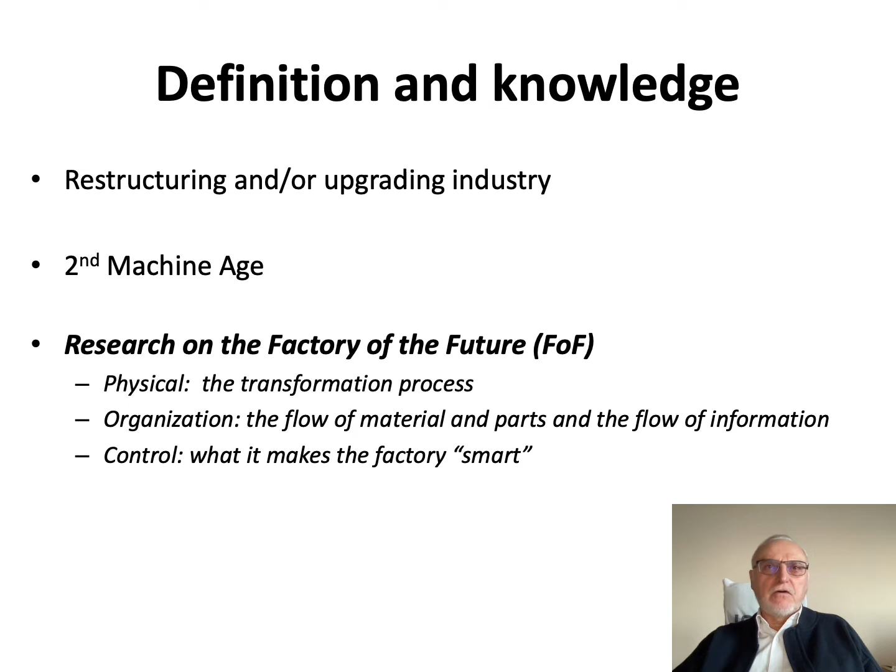And this will be in the idea of a second machine age. First, definition: restructuring and upgrading means how the industry really is changing, has changed, and will change. Then I will give a definition of what is a second machine age. And finally, I will give some indication of how the research on the factory of the future is done presently in our region, for physical organization and control of a factory, what makes a factory smart.

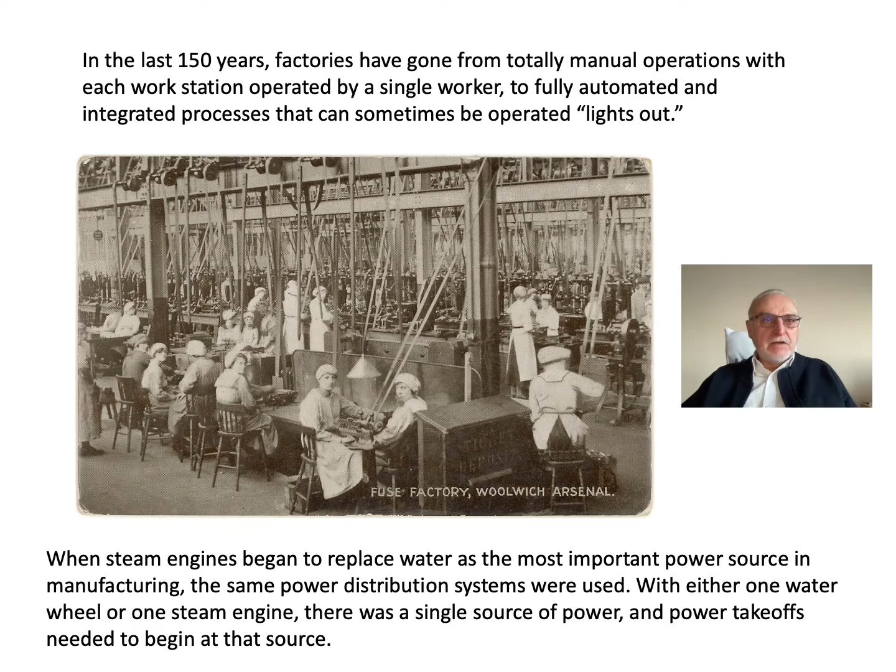In the last 150 years, factories have gone from totally manual operation to single worker, fully automated and integrated process. In some cases, we can even say that the factory can keep working and producing product without light. The steam engine has replaced water as the most important source of energy, and not only steam now, but electricity has changed completely the way in which a factory is run.

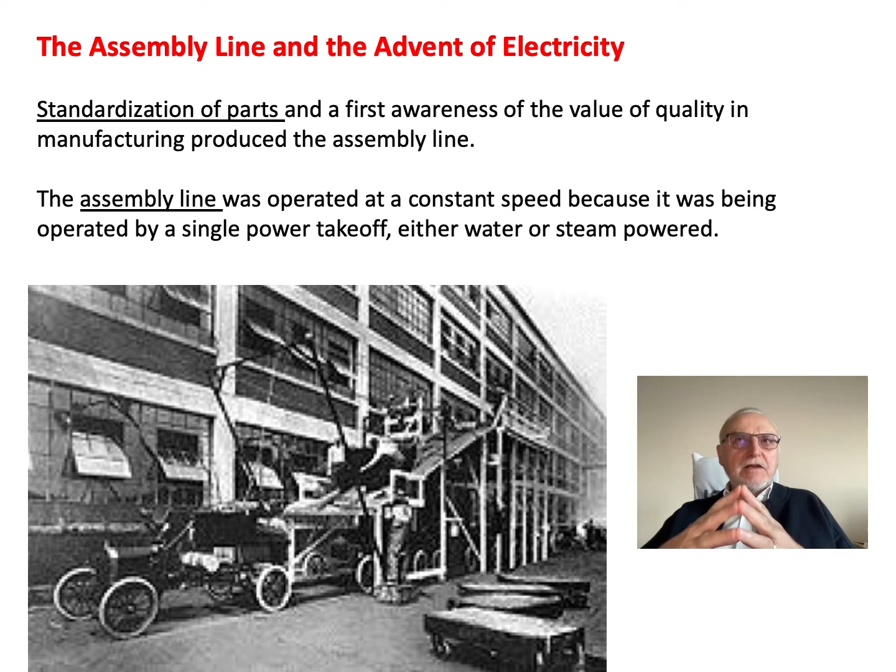But it's not only electricity, as you can see applied here to the first assembly line for car manufacturing, you know very well Ford. But it is also one contribution from Ford as an engineer: the standardization of parts. Because standardization of parts means also to be aware of the value of quality in manufacturing and assembly line.

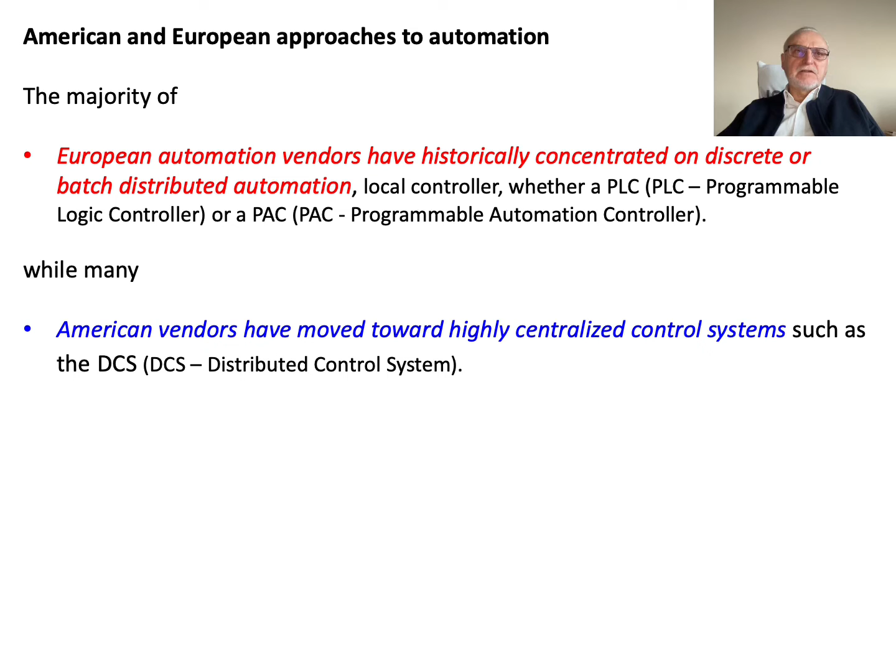American and European approaches to automation are different. The majority of European automation vendors have historically concentrated on discrete and batch distributed automation, some with a local controller that we call a PLC or PAC, Programmable Automation Controller. While many American vendors have moved towards a highly centralized control system such as DCS, Distributed Control System. When manufacturing cells are independent, distributed components, the control level is very sensible. We think that the European way to do automation is more flexible and easier to implement.

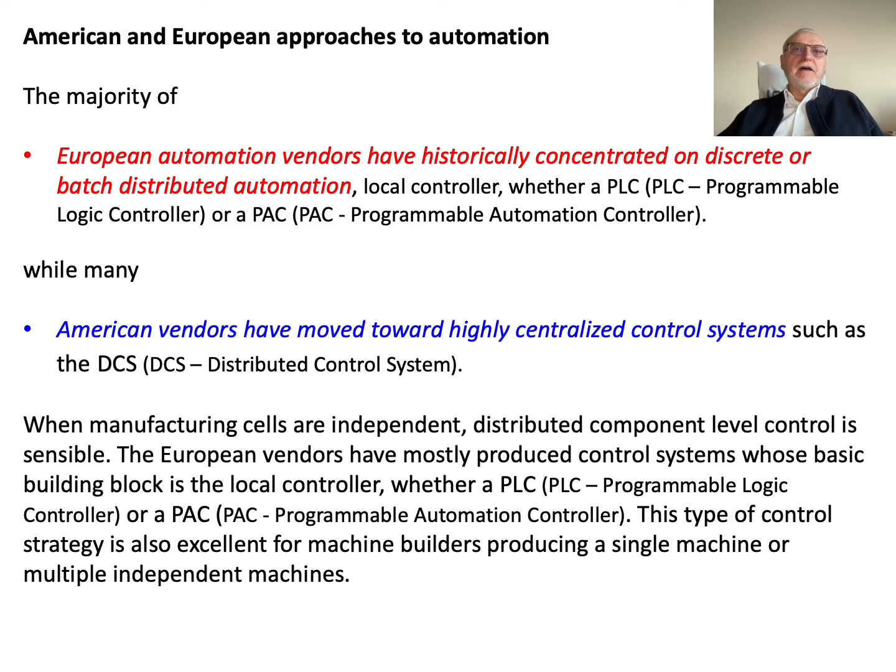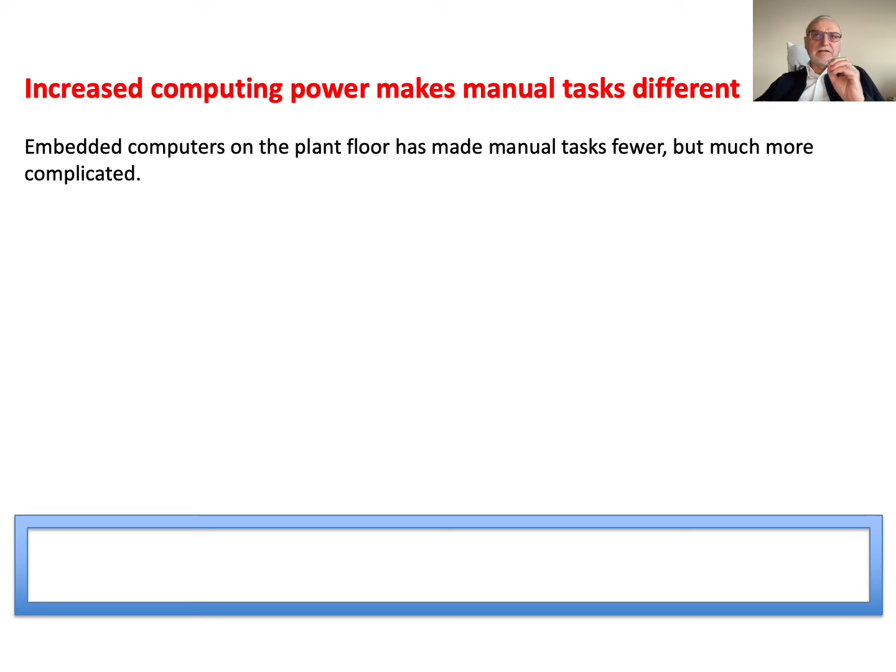Increased computing power is also the next step of a factory of the future. Increasing computing power makes manual tasks different. Embedded computers in the plant floor have made manual tasks fewer but much more complicated. Workers not only do the tasks machines are not capable of performing by themselves, but it is also becoming the worker that is implementing the automation.

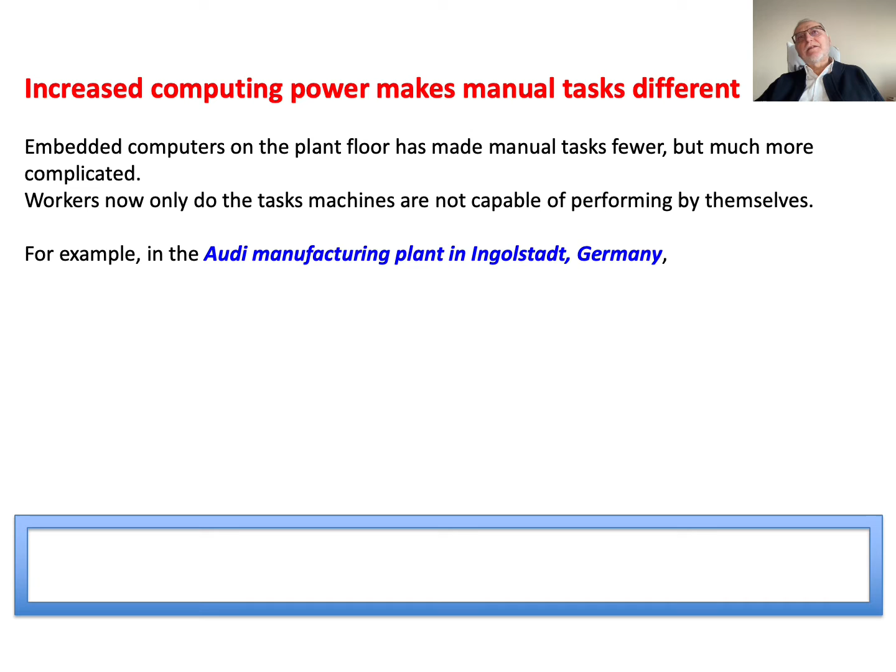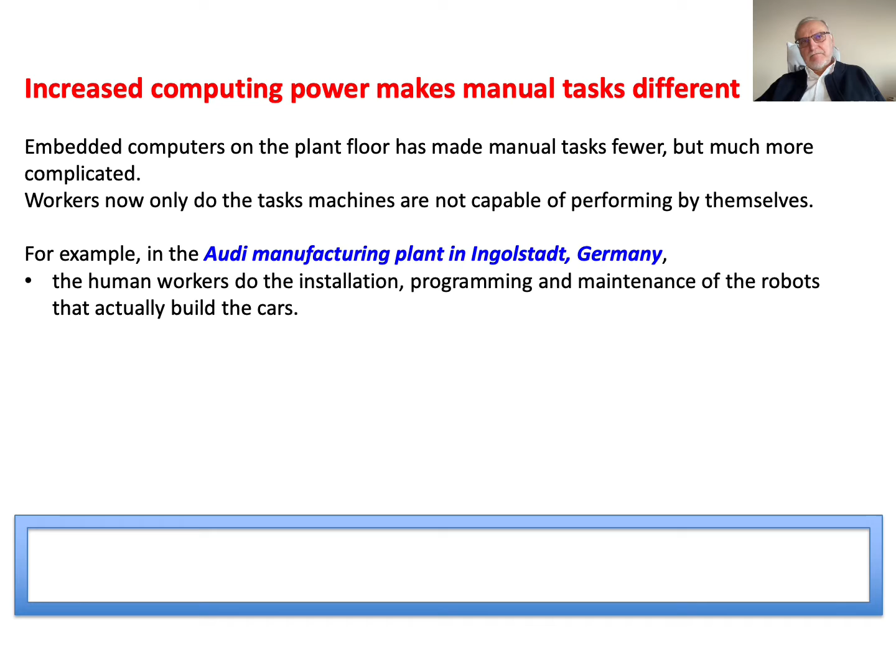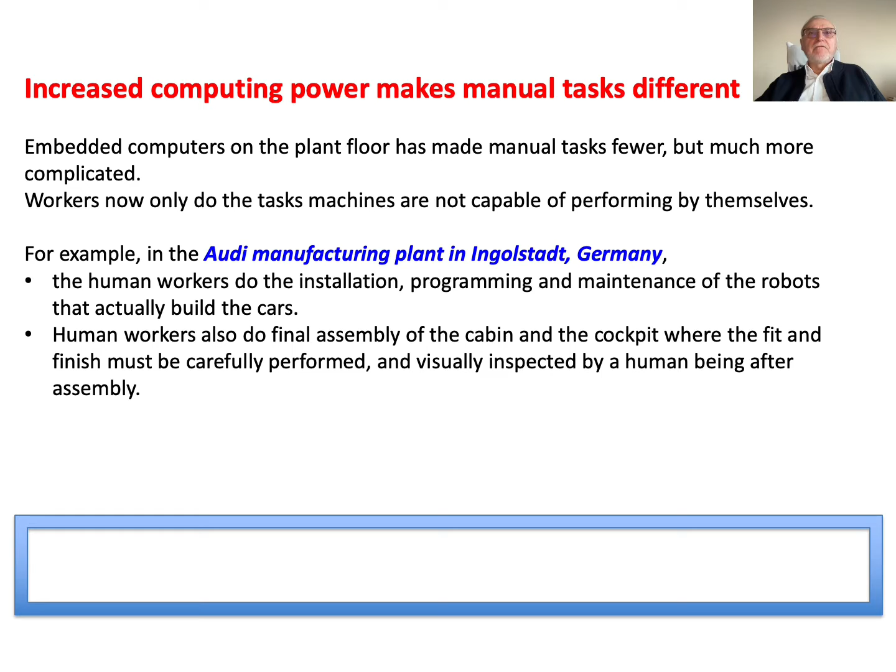For example, in the Audi manufacturing plant in Ingolstadt, Germany, the human worker does the installation, the programming and maintenance of a robot that actually builds the car. Human workers also do the final assembly of the cabin and the cockpit, where the fit and finish must be carefully performed and visually inspected by a human being after assembly.

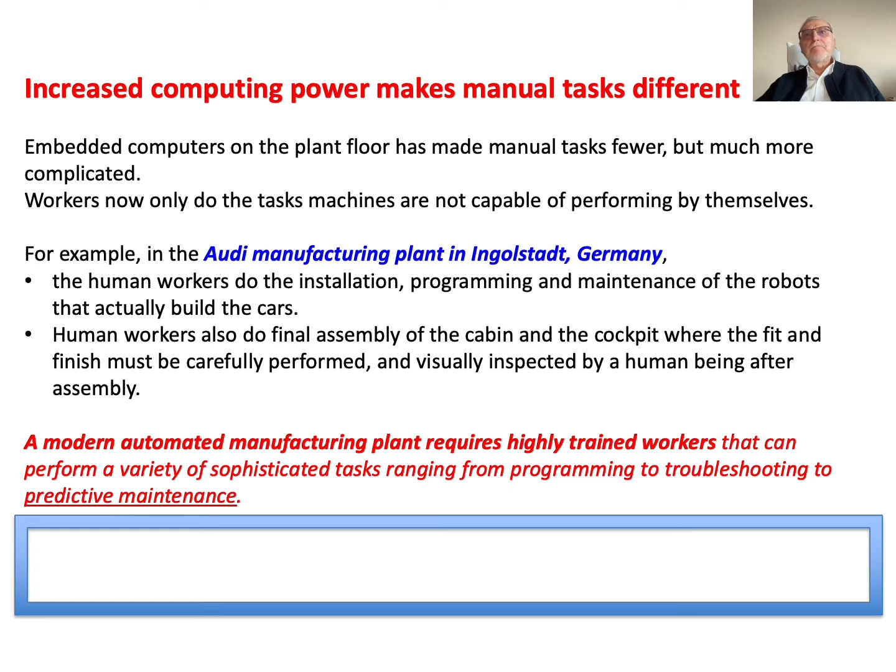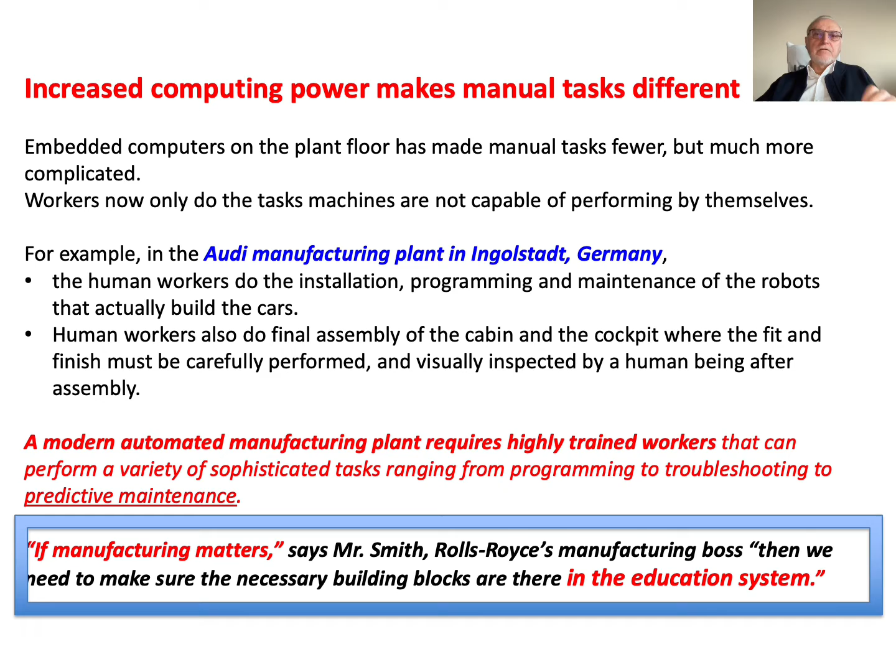A modern automated manufacturing plant requires highly trained workers that can perform a variety of sophisticated tasks ranging from programming to troubleshooting to predictive maintenance. The head of Rolls-Royce Manufacturing said, if manufacturing matters, it is important that all the building blocks are taken into consideration. And particularly, we need education for the workers that are in the plant and around the plant.

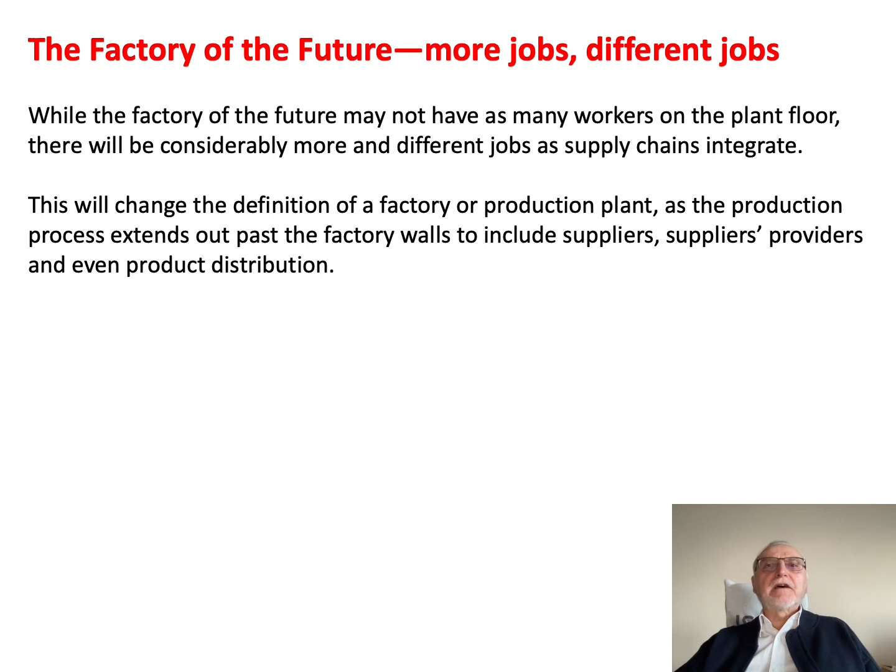The factory of the future implies more jobs, but different jobs. Many people, particularly in Europe, think that automation is killing jobs, but that is true only for certain kinds of job. Many workers on the plant floor can be educated in order to better integrate automation with manual plant work.

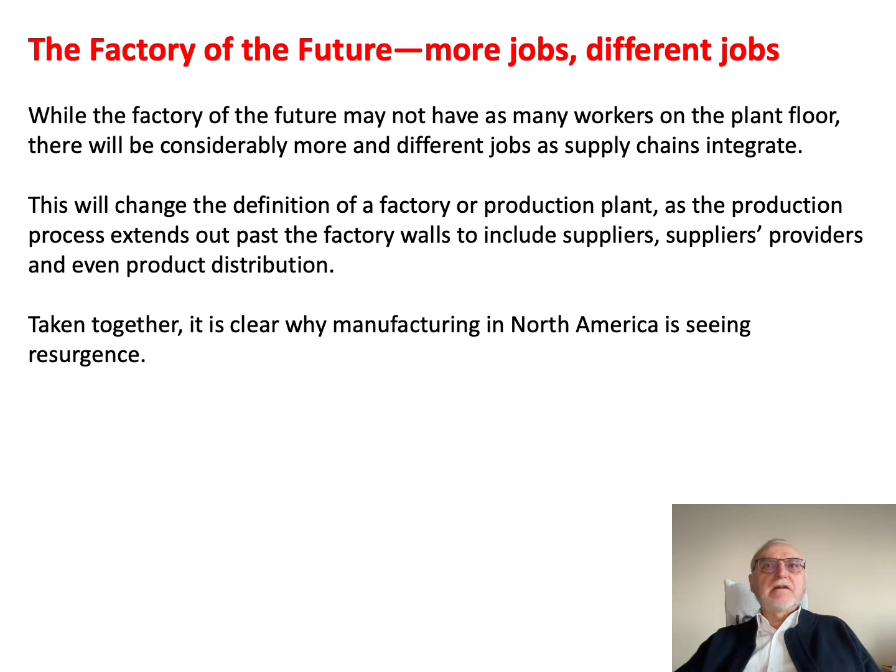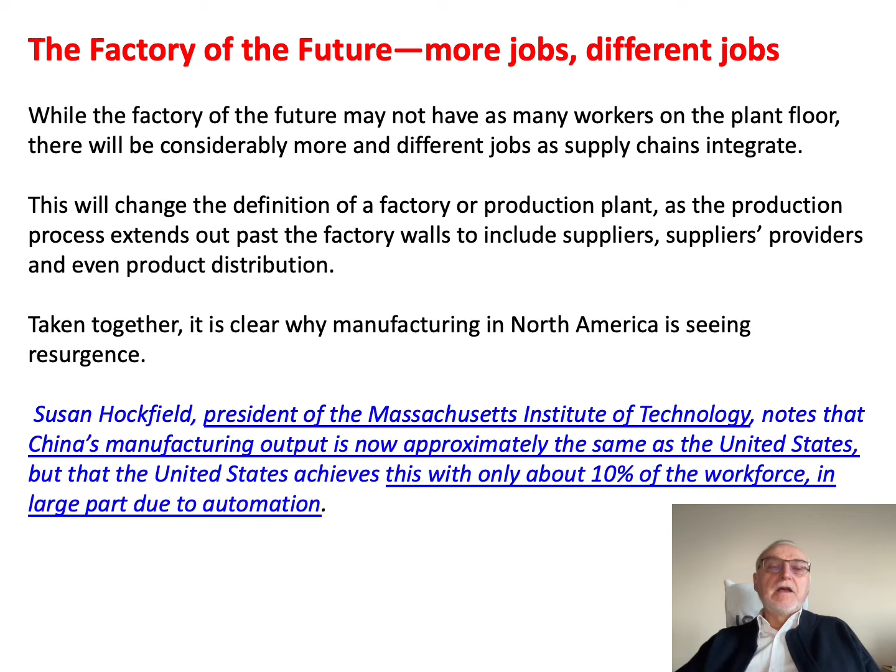Taken together, it is clear why manufacturing in North America is seeing a resurgence. For example, the president of Massachusetts Institute of Technology notes that China's manufacturing output is now approximately the same as the United States, but that the United States achieved this with only about 10% of the workforce, in large part due to automation. However, China is moving fast.

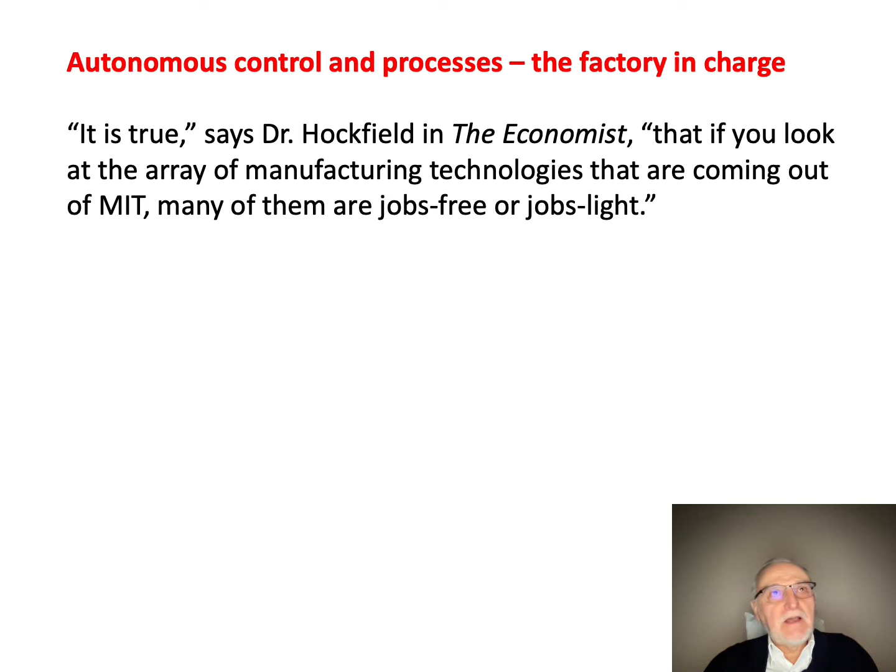So, when we start to talk about factory of the future, we also talk about autonomous control and processes. The factory becomes in charge. It's not only human, but also machine working together. And when we see what are the technologies coming out of MIT, many of them are jobs free, or job lights.

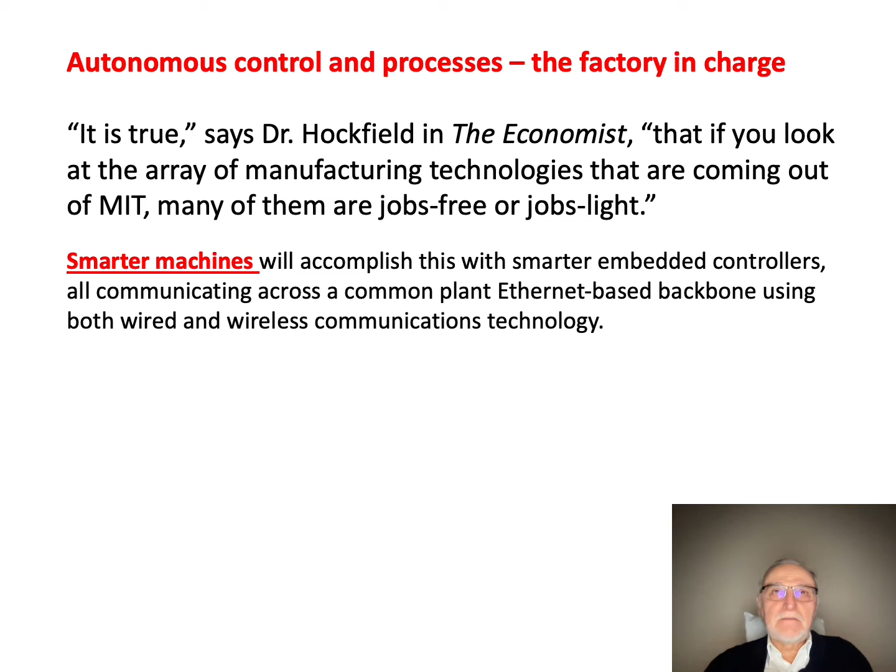Machines are smarter. We'll accomplish this with smarter embedded controllers, all communicating across a common plant, Ethernet-based backbone, using both wired and wireless communication technology. But also the software is taking a very big jump in performance and ease of use.

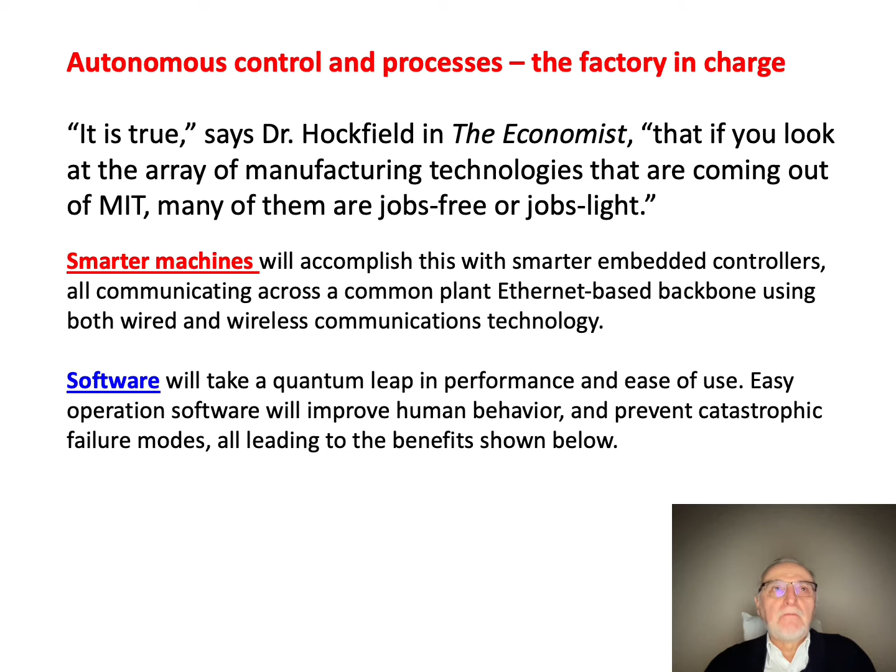Easy operation software will improve human behavior and prevent catastrophic failure modes, all leading to the benefits shown below. For example, the problem with a non-automated factory is high variance of finished product, poor quality, low throughput, poor worker safety, large headcount, difficulty to reconfigure for changing product, and large inventory required.

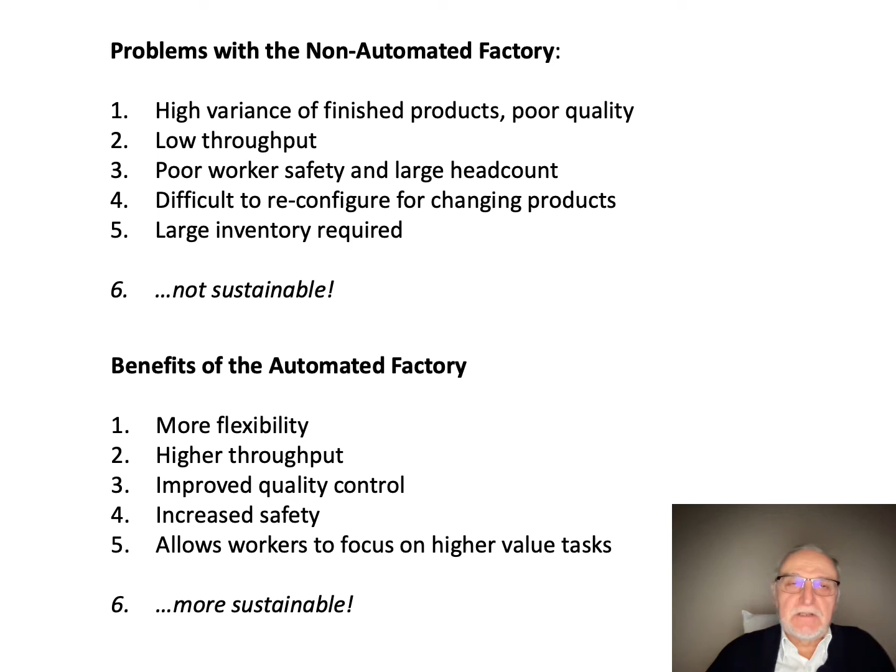This is not sustainable. Instead, the benefits for the automated factory are that it's more flexible, there is higher throughput, improved quality control, increased safety, and it allows workers to focus on very high value tasks. This is much more sustainable. The Internet of Things is also what enables the factory to go out of its own physical site.

If we take this definition of Internet of Things, and others, first there is an ubiquitous nature of connectivity — connectivity is everywhere. Second, every object is identified globally around the world. And third, the ability of each object to send and receive across the internet or the private network they are connected into.

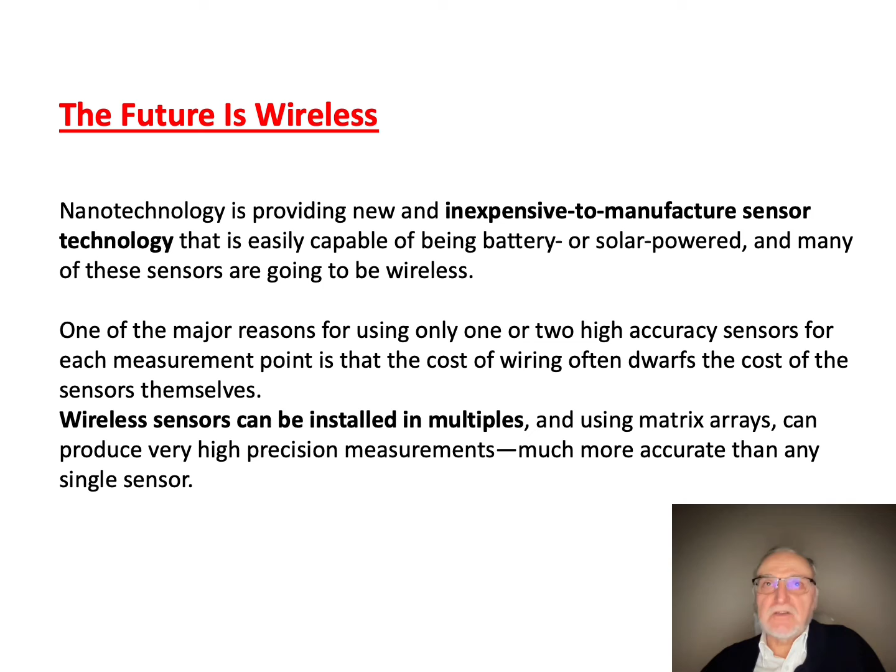But what is also very important is wireless. The future is wireless. Nanotechnology is providing new and inexpensive to manufacture sensors that are easily capable of being battery or solar powered, and many of these sensors are going to be wireless. One major reason for using only one or two higher accuracy sensors today is that for each measuring point we can have only one, maximum two — but this is not so reliable. Wireless sensors instead, installed in a multiple matrix array, can produce very high precision measurements that are much more accurate than any single sensor.

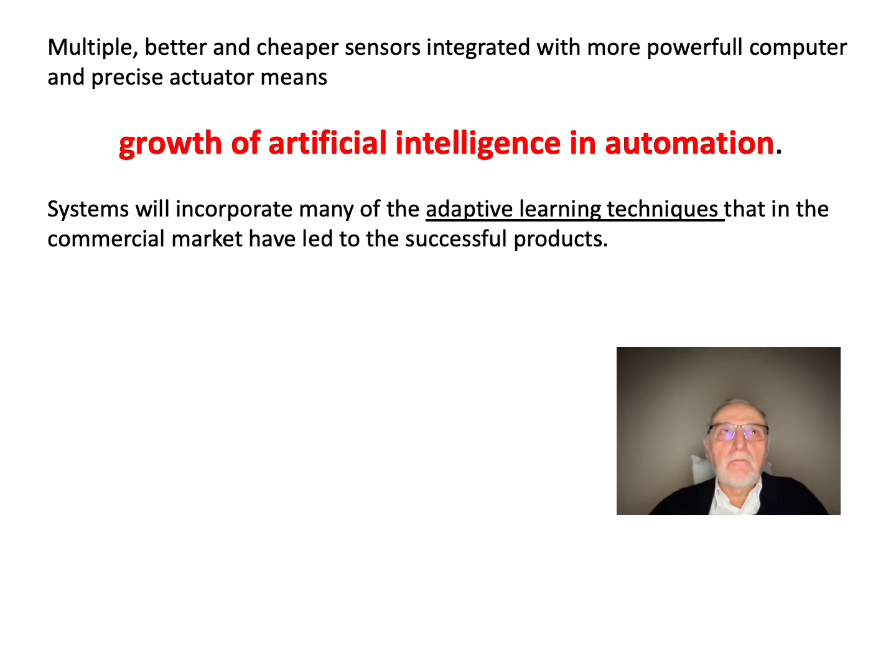Another area coming on strong now is the growth of artificial intelligence in automation. Systems will incorporate adaptive learning techniques that in the commercial market have led to successful products. In manufacturing it is more complex, but it can be done.

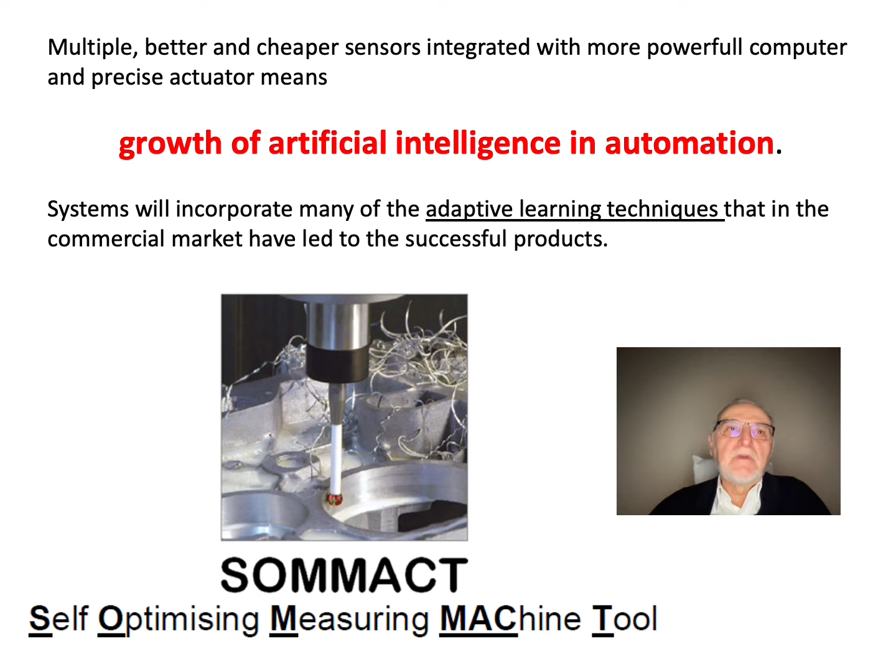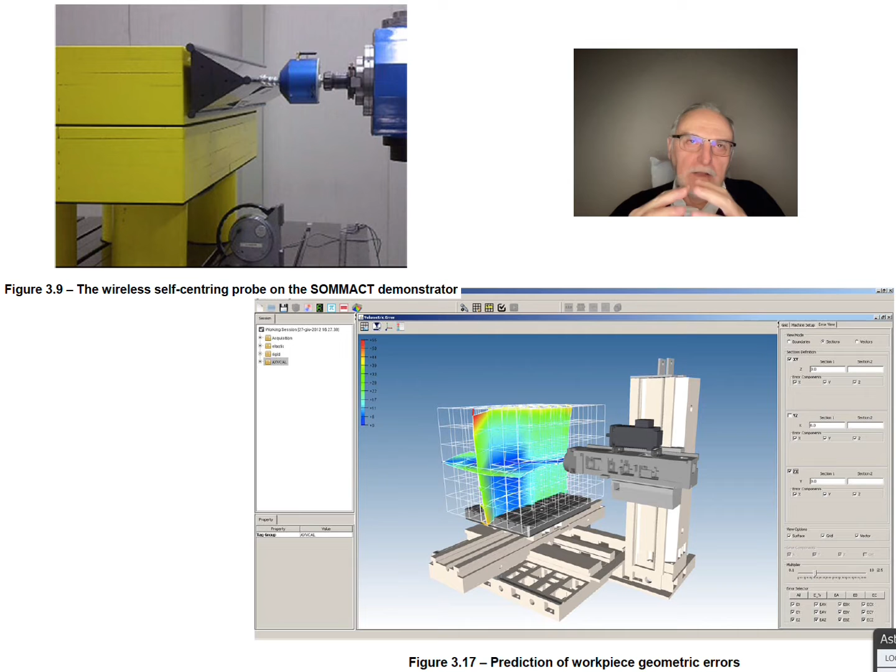This is one of the projects we have been working on. The machine can, on one side, measure — you see on top a wireless self-centering probe — and on the other picture there is the real machine, which seems to be connected, interfaced, and integrated with a virtual model of the product being manufactured. The different colors give different degrees of precision of the manufactured product.

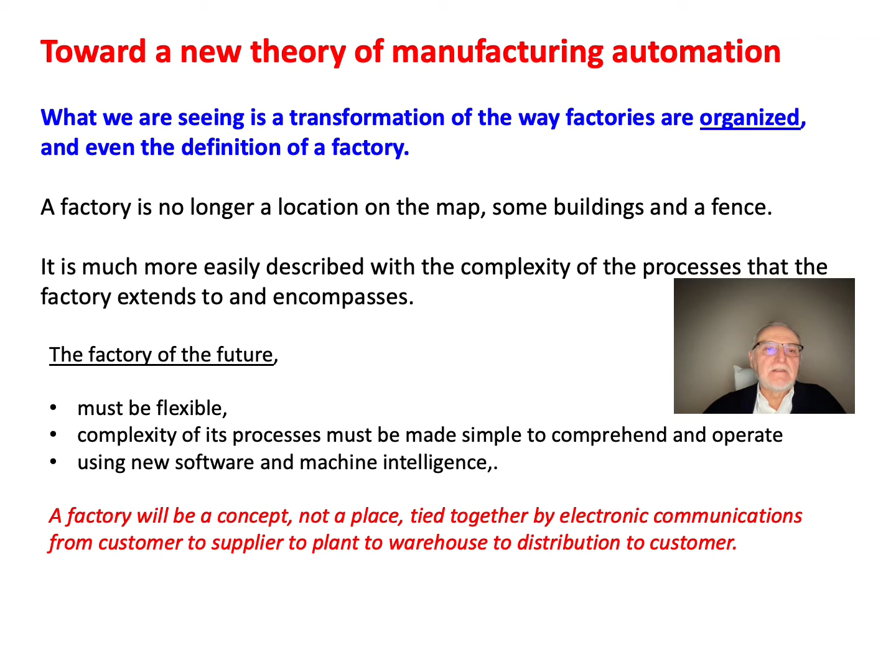Towards a new theory of manufacturing automation. Remember at the beginning we talked about organization. The new factories are much more organized in definition, and the definition of a factory has changed. A factory is no longer a location on a map, some building with a fence. It's much more easily described by the complexity of the process that the factory extends and encompasses. The factory of the future must be flexible; the complexity of the process must be made simple to comprehend and operate using new software and machine intelligence.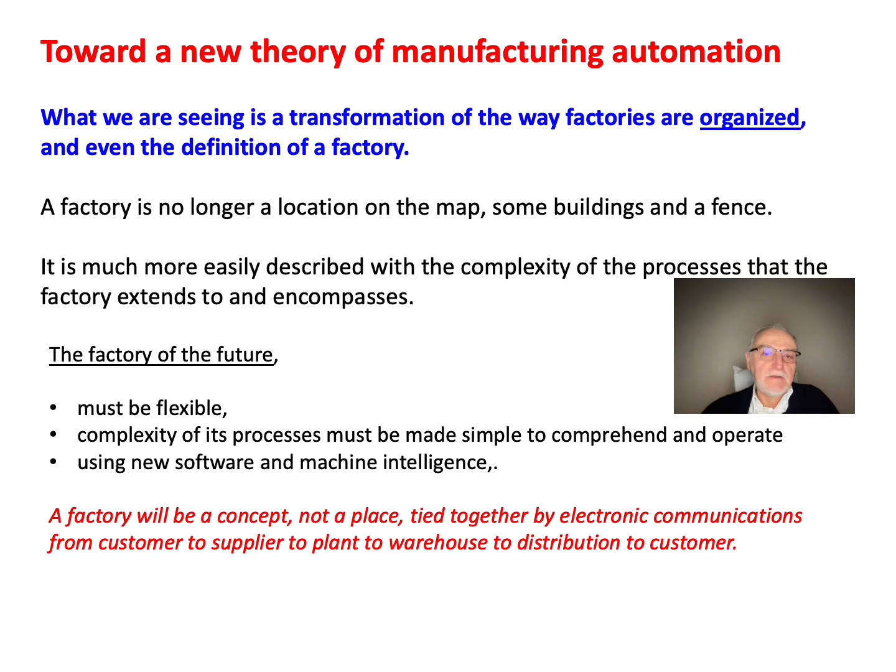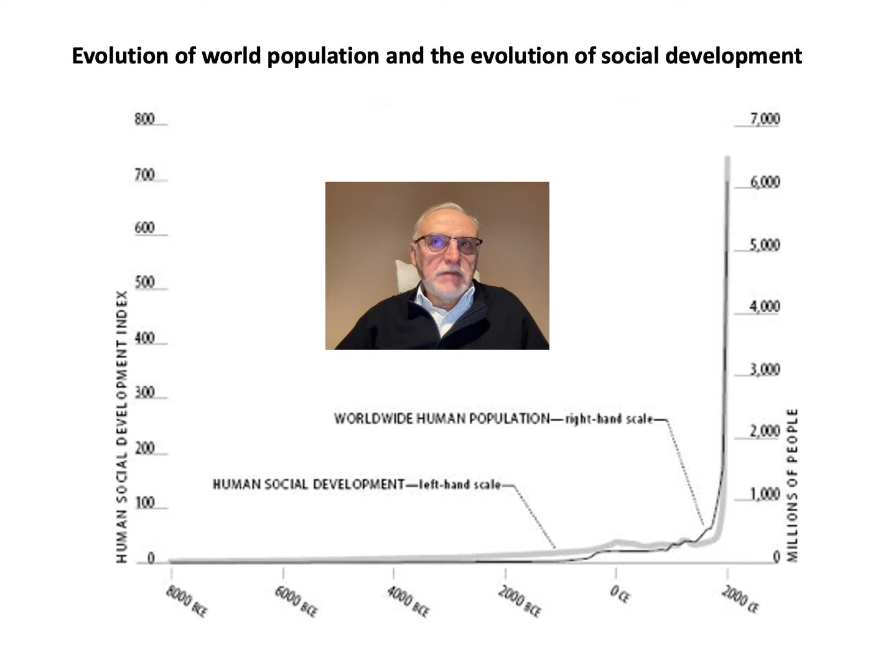But at a certain point, as you see here, these two curves start to go up very sharply, both in terms of population and in terms of human social development. There is one point where this happened — when Watt the engineer developed and introduced the steam engine in 1775. This is considered really the first industrial revolution.

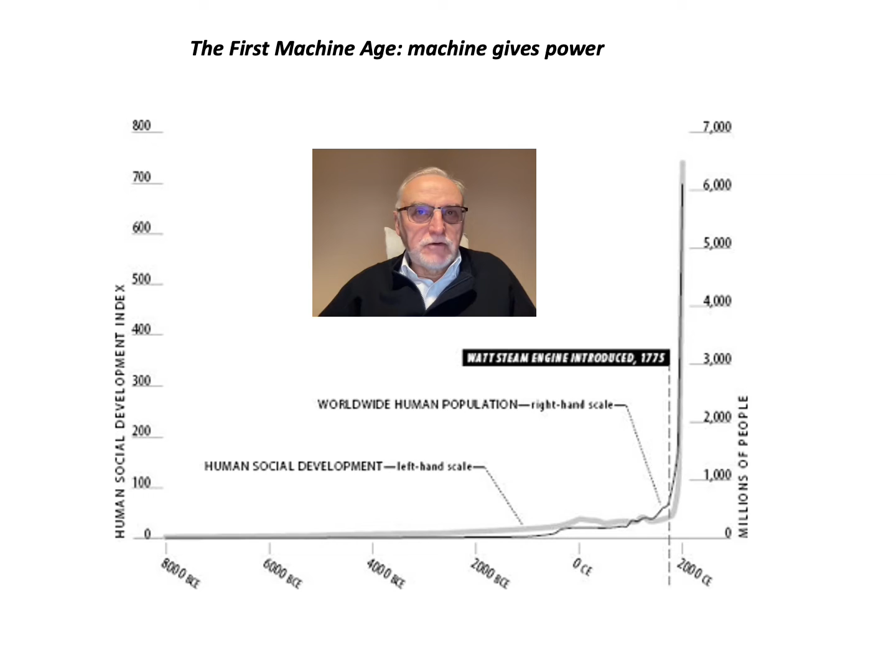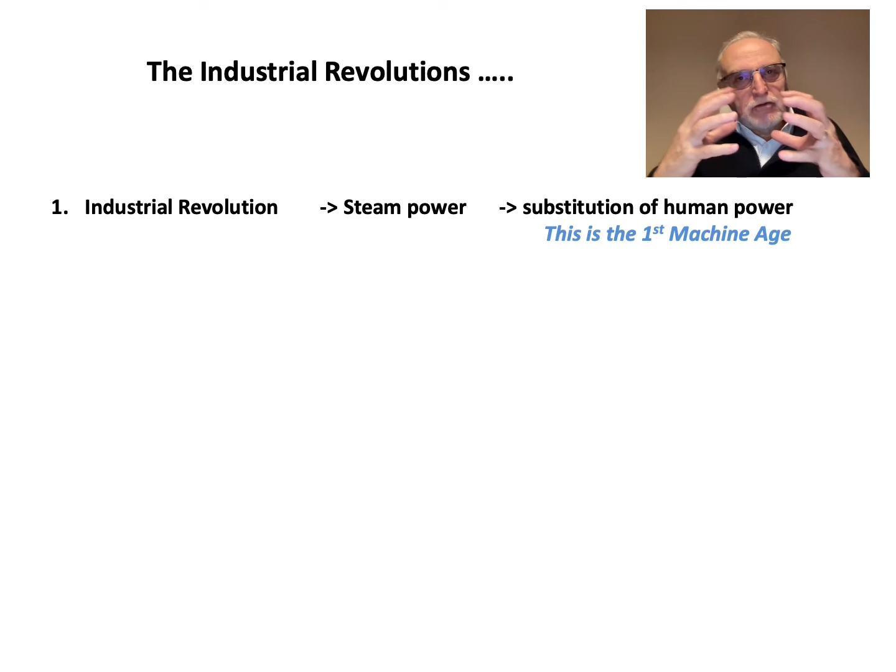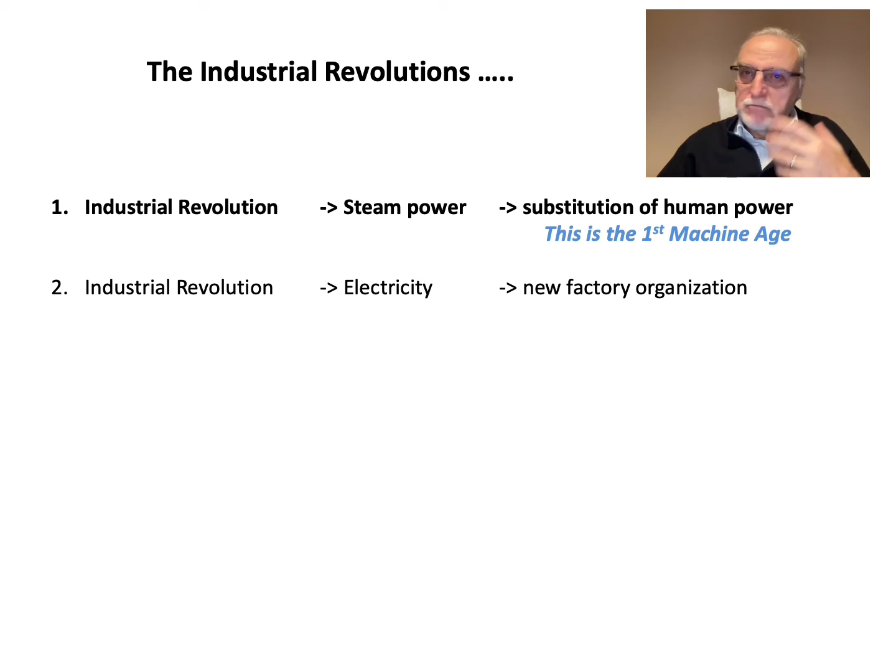So if we look at the industrial revolutions we know quite well, the first one was steam power. Steam allowed the substitution of human power, and this is considered the first machine age. Then we had other revolutions, like electricity, which brought new factory organization, and the computer, which brought new factory control, and finally we are now in the process of introducing artificial intelligence. Artificial intelligence is the substitution of the human brain — this is the second machine age.

So we can talk about as many industrial revolutions as we want, but in fact there are two precise moments: the first machine age, human power, and the second machine age, human brain. What will be the next industrial revolution? We believe it is sustainable manufacturing. It seems that we are doing that already.

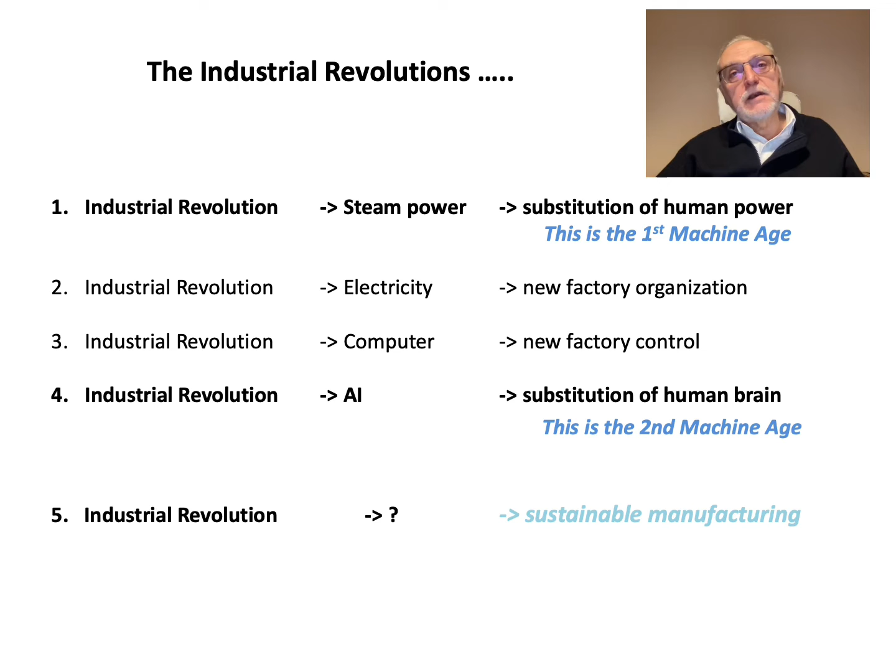To have a product, we need to go to the design, manufacturing, and then the manufacturing is divided into physical, control, and organization. Physical is the process, and the organization gives the flow. Control ties the two aspects together in the manufacturing.

Now, of course, we are in the age of 3D printing. And 3D printing is one way to go almost directly from the design to the process. But that needs to be understood and controlled very well.

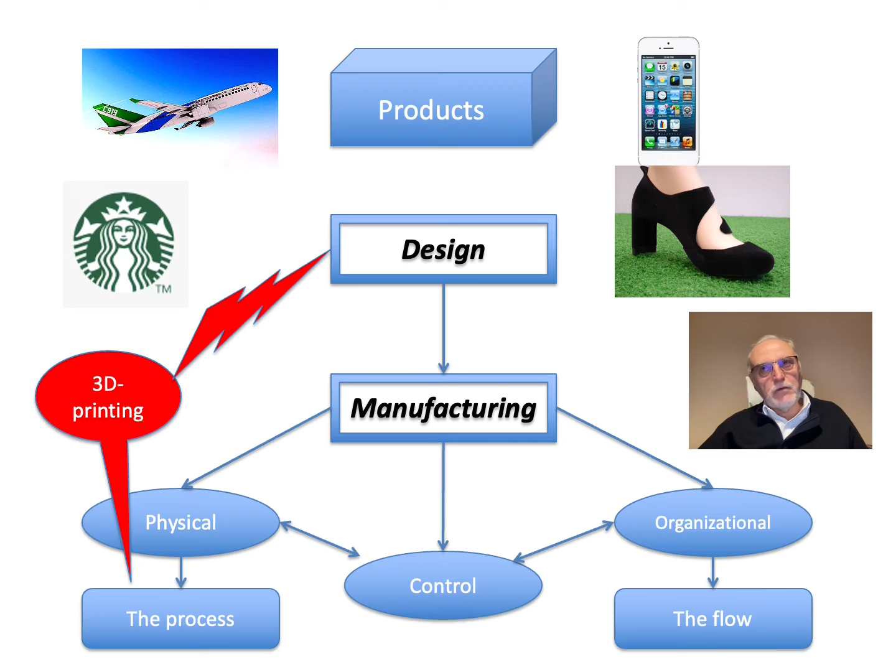My final point is about the frontier research in EU and Switzerland. We are facing two big challenges: one is a society that is changing, and the other is mega trends in technology and organization. Both these aspects are a challenge for manufacturing that bring a key technology, and therefore we need new research priority.

We are working on this already for some time in Europe and in Switzerland, but I will only mention here, apart from advanced manufacturing process, mechatronics, information communication technology, and manufacturing strategy, we are concentrating very much in this phase on modeling, simulation, and forecasting methods and tools. These are key technologies that will help the factory of the future implementation.

The last one, not the least one, is knowledge worker. We need workers that are able to understand and work in this new automated factory.

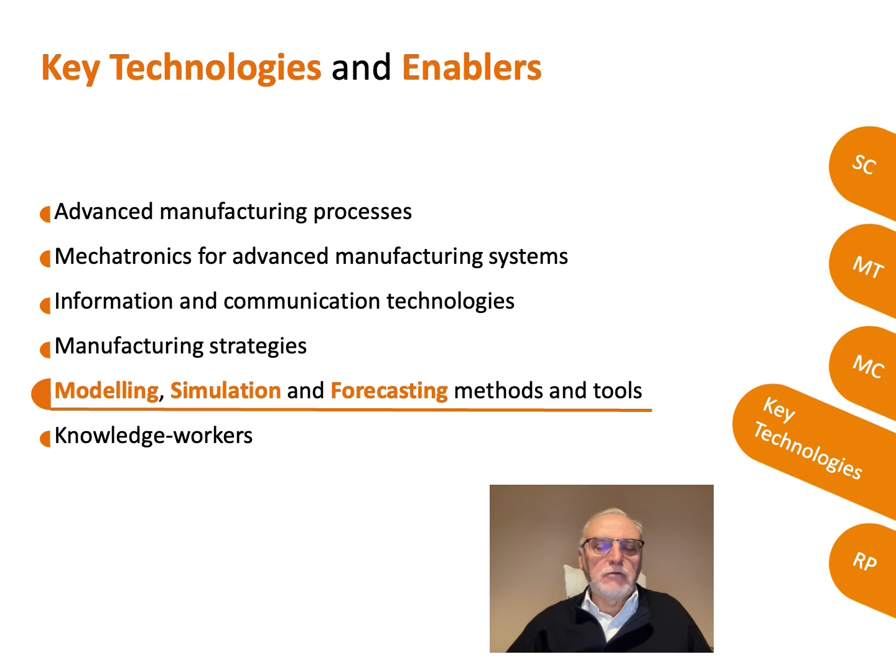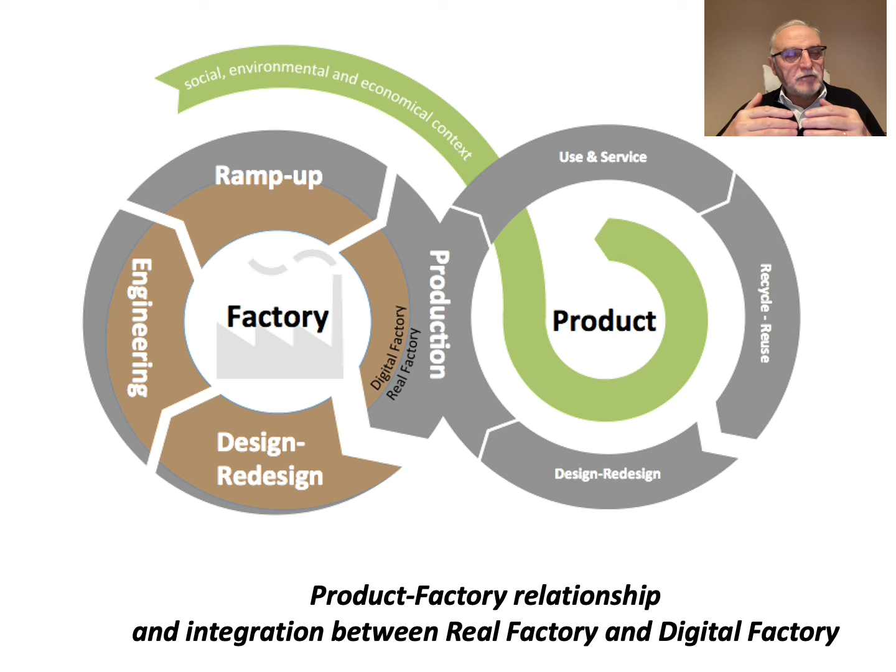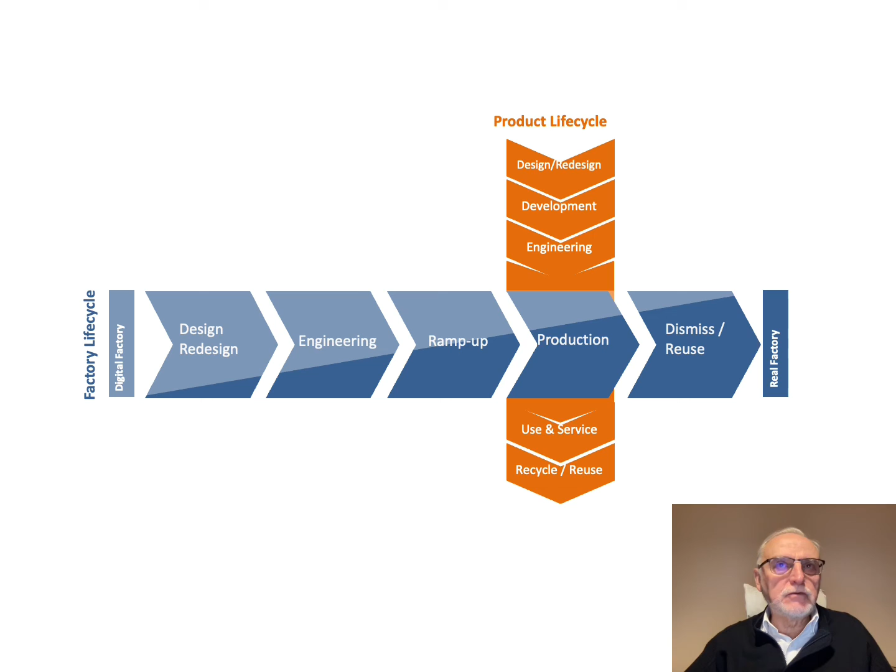In this other representation, we have vertically the product life cycle that goes through design, development, engineering, production, use and service, and recycle. On the horizontal axis, instead, we have a factory life cycle, starting from design, engineering, ramp-up, production, and dismiss and reuse. The light blue is what we call digital factory, and dark blue is the real factory.

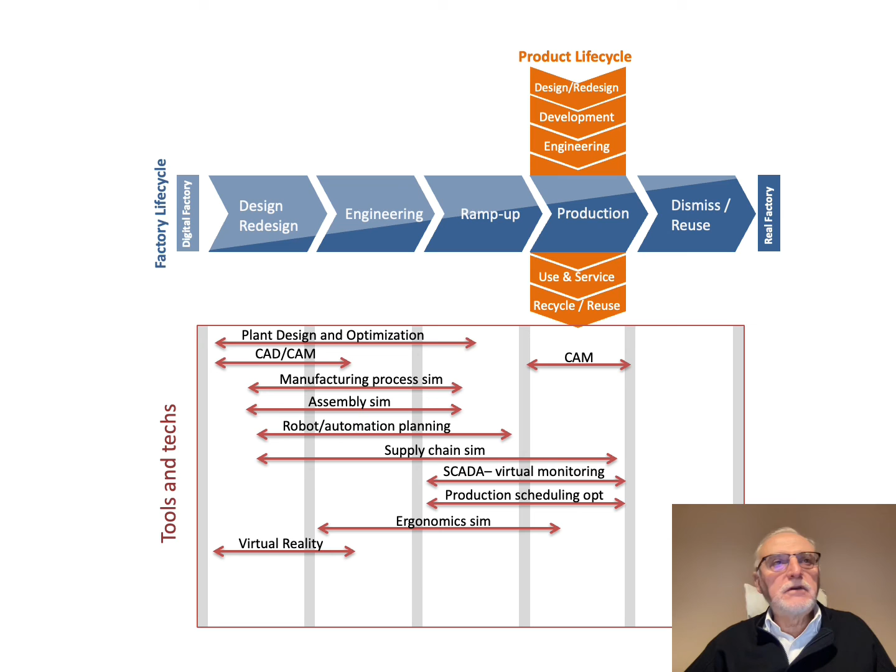Of course, we already have many of the tools, and we have been using them for some time, but new tools need to be designed and redefined.

Why? Because the factory of the future, in fact, is not by itself. Factory of the future is living and integrated in the society: village, city, shop, other factory, environment, and of course, man.

Then the factory is part of a very smart networked world, more and more smart. So there is the factory smartness inside the factory and outside. Outside is Internet of Things, Internet of Brains, Internet of Service, smart products, smart buildings, and so on. Everything will need to be connected. We are still far from having this.

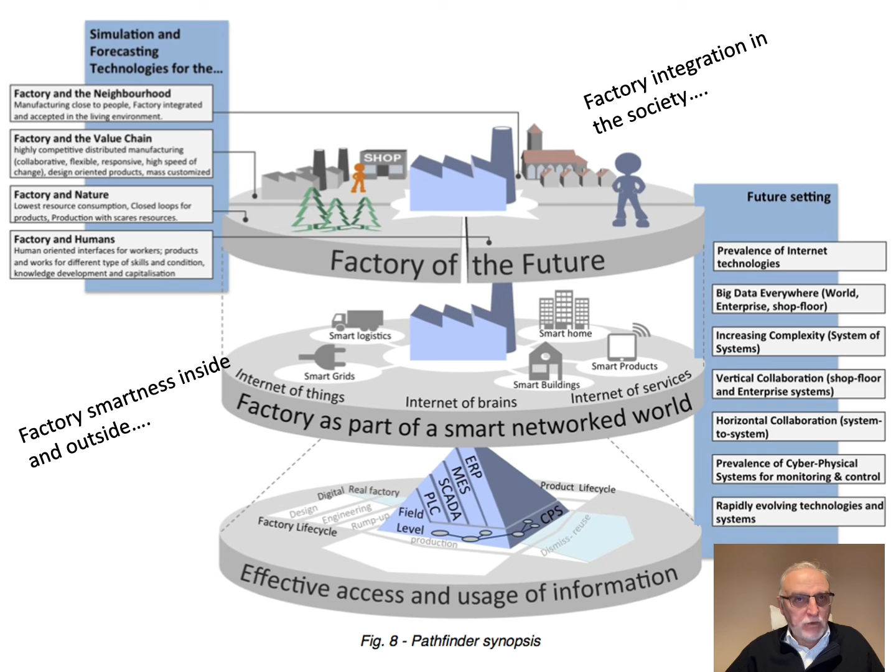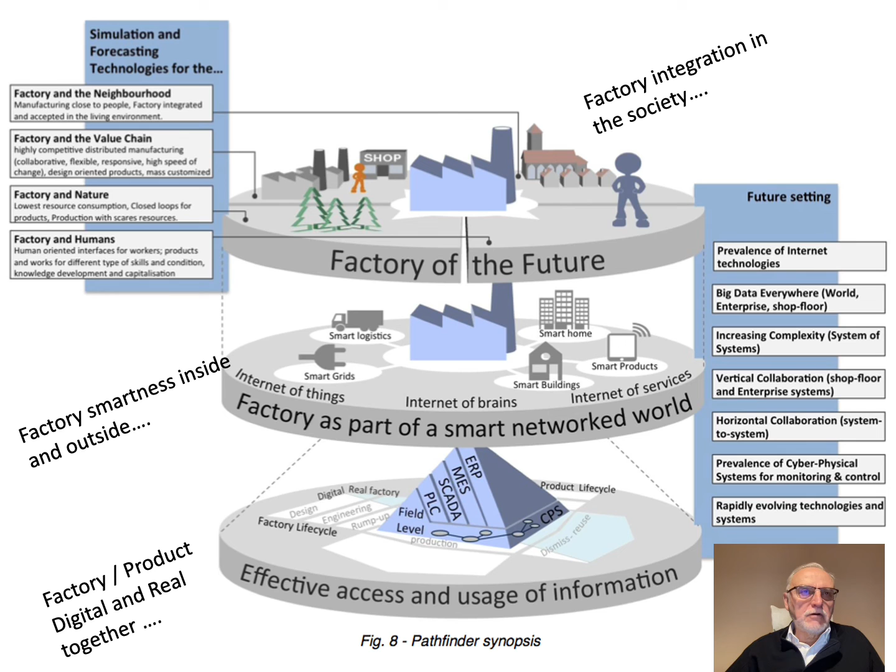And finally, we have what we explained before, the interaction between the factory and product, digital and real together. We have been working on this for some time already, but there is still a lot of work to be done.